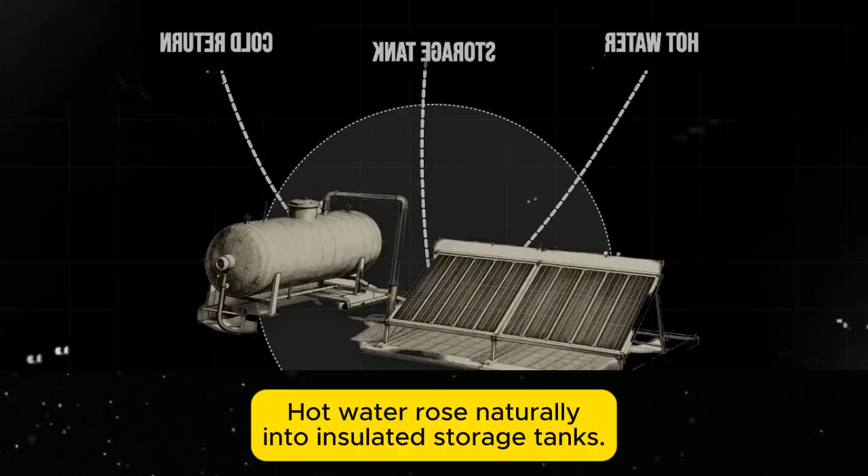Hot water rose naturally into insulated storage tanks. Cold water flowed back down to be heated again. No pumps, no motors, no operating cost. The system worked day after day with nothing but sunlight and gravity.

By 1941, more than 50,000 homes in Florida alone were running on solar thermal energy. Families in Miami and Tampa had hot water and supplemental heating while paying nothing to utility companies. This was not experimental technology. This was not fringe science. This was functioning infrastructure serving tens of thousands of American households.

And then, the eraser moved in. After World War II, natural gas pipelines spread across the nation. Petroleum companies, swollen with wartime profits, pushed aggressively into state legislatures. Building codes began to change. Homes suddenly needed gas lines, furnace rooms, ventilation systems, and installations that only licensed contractors could handle.

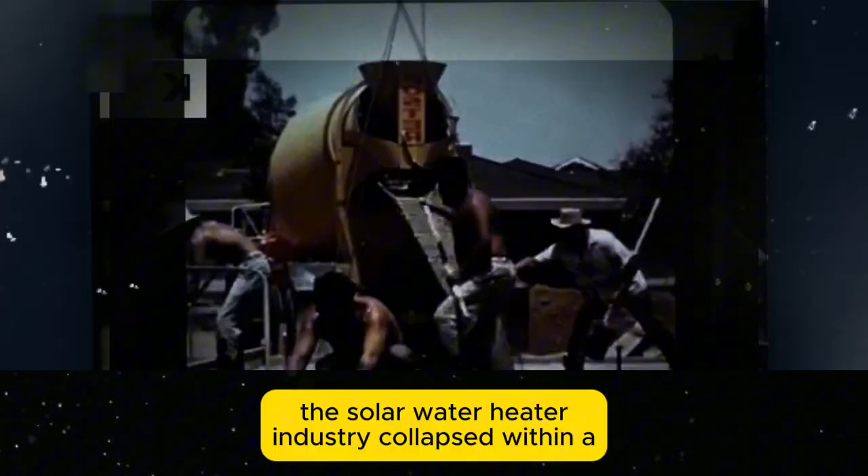Solar thermal research lost funding. Patents were bought and locked away. In Florida, the solar water heater industry collapsed within a decade as artificially cheap natural gas flooded the market. An entire generation grew up without ever realizing their grandparents had once built working solar systems on their own rooftops.

The knowledge did not disappear because it failed. It disappeared because it threatened the wrong balance sheets. But the physics never changed.

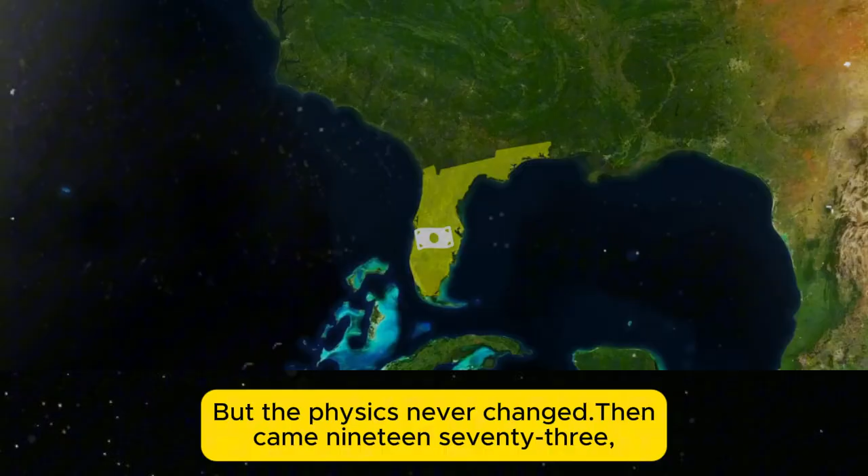Then came 1973, and the Arab oil embargo forced Americans to remember what had been buried. Heating fuel shortages spread fear across the country. Gas station lines wrapped around blocks. Thermostats in homes across the Northeast dropped to 55 degrees Fahrenheit. Families in Minnesota and Michigan stared into winter without knowing if they would have enough fuel to get through it.

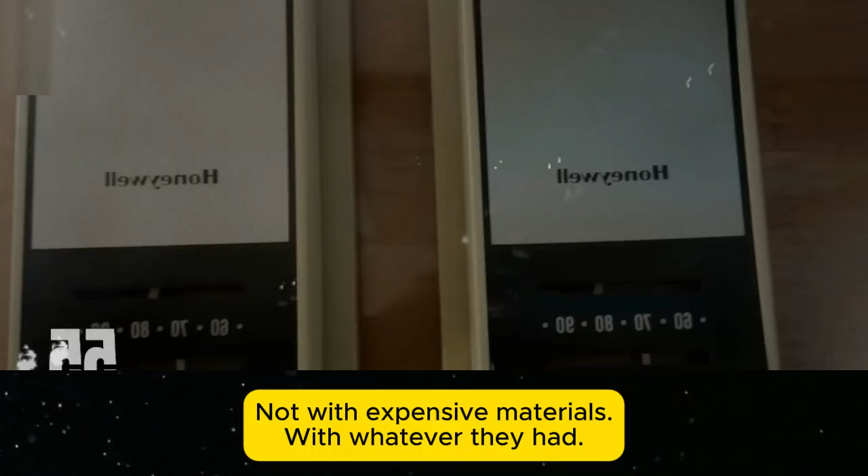And in garages, sheds, and workshops across America, backyard inventors started experimenting again. Not with luxury systems, not with expensive materials, with whatever they had. They tried sheet metal, copper tubing, old radiators painted black.

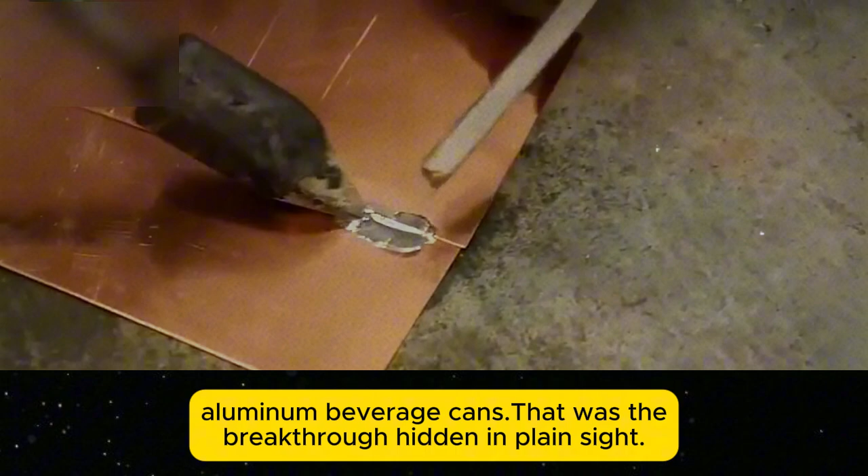But one design rose above the rest because it used something almost every household already had in abundance: aluminum beverage cans. That was the breakthrough hidden in plain sight. Hollow cylinders that naturally channeled airflow. Aluminum that transferred heat with remarkable efficiency. The supply was effectively endless.

Every week, every house produced more of them. And the numbers backed it up. Aluminum conducts heat about 5 times better than steel. That was not just convenient, it was almost perfect.

Mother Earth News published construction plans for PopCan solar heaters in 1977, and tens of thousands of readers built them that very winter. Then reports started pouring in from Vermont to Colorado. Output air temperatures rising by 30 to 40 degrees Fahrenheit.

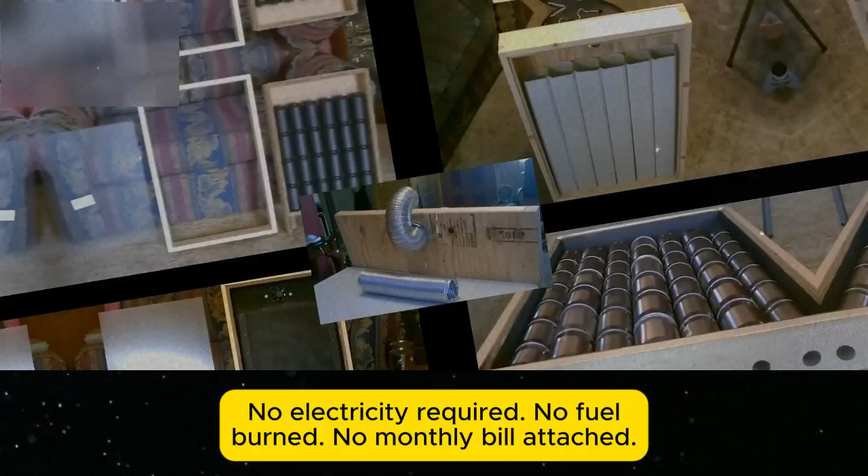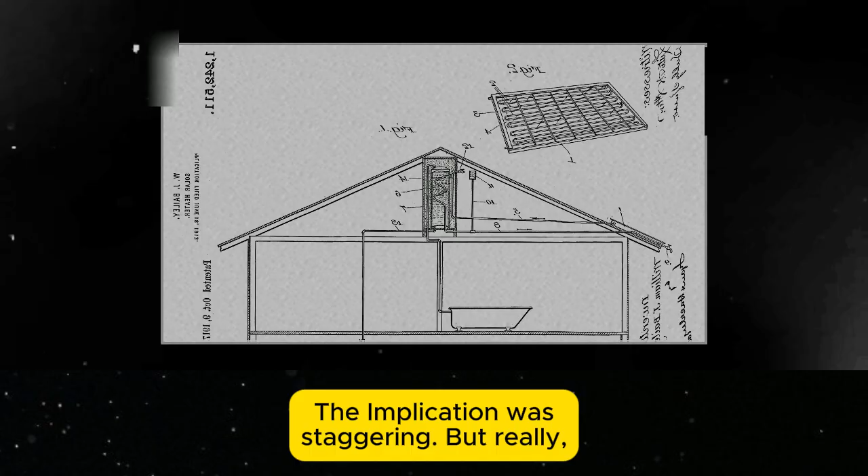Rooms warming noticeably on sunny winter days, with no electricity required, no fuel burned, no monthly bill attached. What made it even more astonishing was this: the same thermosiphon principle William Bailey patented in 1909 worked just as effectively with beer cans as it had with copper pipes. Ordinary people realized they could heat their homes using materials headed for the landfill. The implication was staggering, but really the only thing shocking was how long people had been taught not to notice.

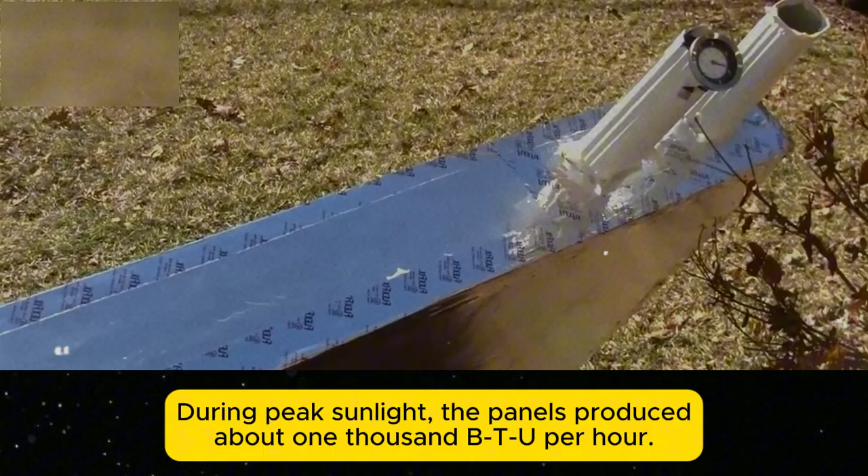Modern science has since confirmed what those 1970s builders discovered with their own hands. In 2019, researchers at the University of Alberta in Canada tested do-it-yourself pop can solar heaters in real winter conditions, not ideal lab conditions, real cold. At minus 15 degrees Celsius, with snow on the ground, the test panels still achieved a steady 20 degree Celsius temperature rise in the output air. During peak sunlight, the panels produced about 1,000 BTU per hour. That is not symbolism, that is not hype.

That is measurable, useful heat pulled out of recycled waste. The National Renewable Energy Laboratory has also documented that dark-colored surfaces absorb about 95% of incoming solar radiation. Flat black paint on aluminum reaches exactly that kind of absorption performance. Commercial solar air heaters priced between $2,000 and $4,000 use the same underlying physics, the same sun, the same heat trapping, the same air movement.

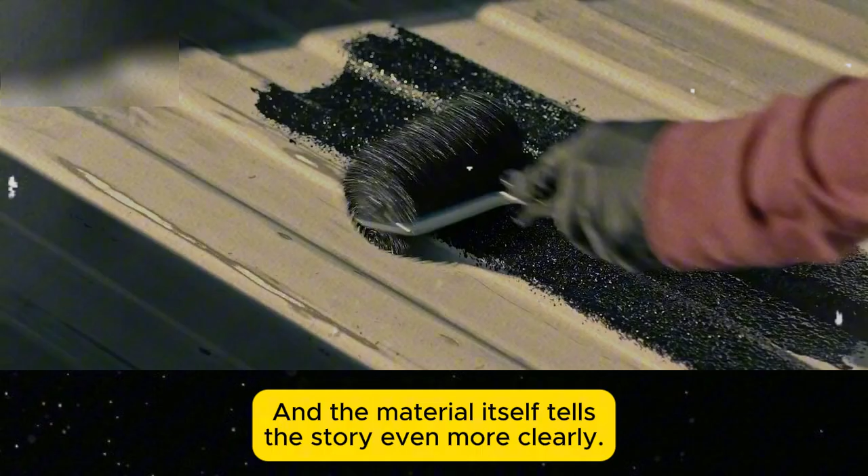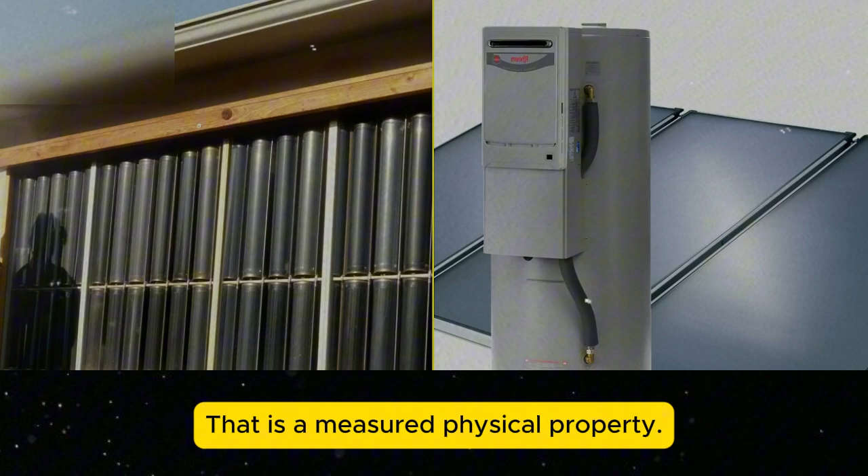The only real differences are branding, packaging, and building code approval. And the material itself tells the story even more clearly. The aluminum in a Coca-Cola can conducts heat at 205 watts per meter Kelvin. That is not a guess, that is not a sales pitch, that is a measured physical property. It does not matter whether that aluminum is sitting in a research laboratory or crushed under coffee grounds in your recycling bin. The physics stays the same, the opportunity stays the same. Only our attention changes. So how does a wall of empty cans actually heat a house?

The answer is almost embarrassingly simple, and that may be exactly why it was so dangerous to industries built on complicated systems and recurring payments. Hot air rises, cold air falls. That is the thermosiphon principle. No electricity, no pumps, no moving parts.

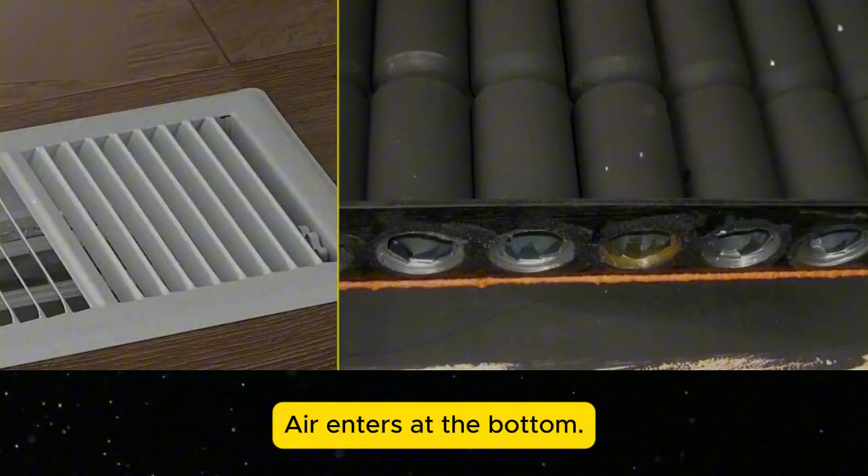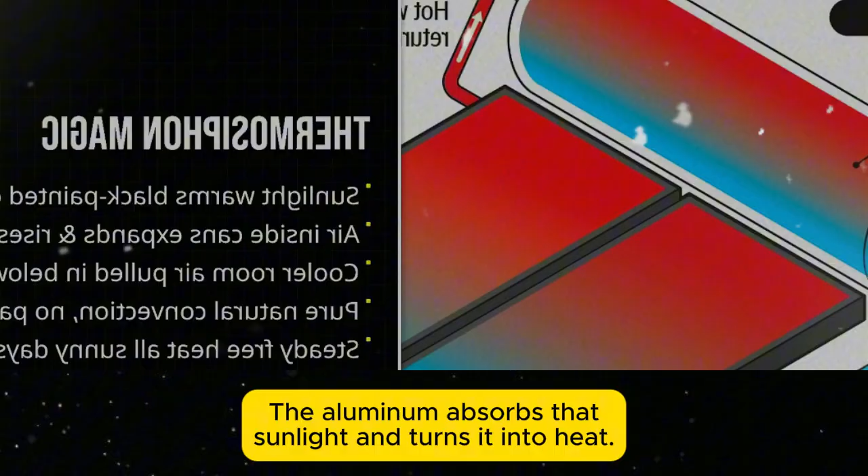Imagine a vertical column of aluminum cans with the tops and bottoms removed. Air enters at the bottom. Sunlight passes through the glass glazing and strikes the black painted cans. The aluminum absorbs that sunlight and turns it into heat. The air inside the cans warms quickly, and because warm air is less dense than cold air, it rises through the column and exits at the top. That rising air creates negative pressure at the bottom, which pulls more cool air in. The cycle repeats itself as long as the sun is shining.

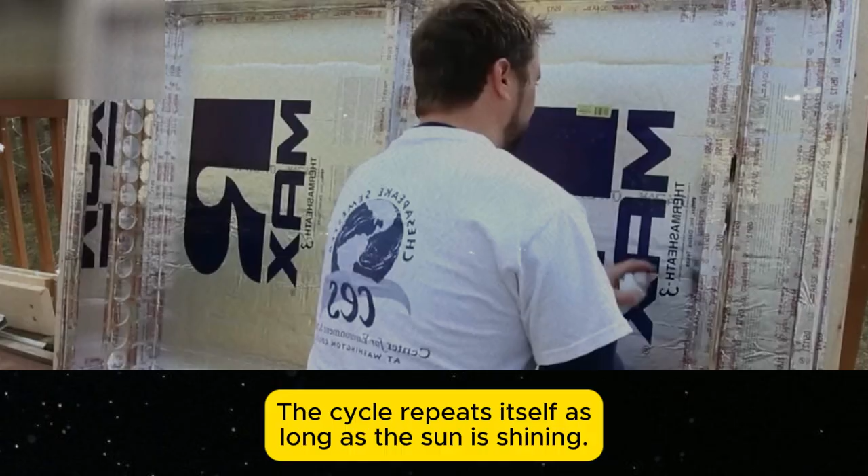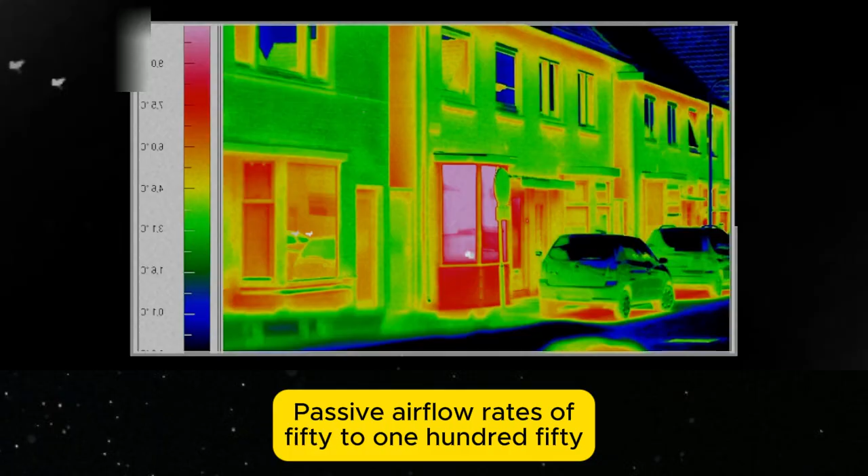That means no switches to flip, no buttons to press, no fuel deliveries. The sun does the work while you live your life. Passive airflow rates of 50 to 150 cubic feet per minute can occur with zero energy input. And the glazing is what makes the whole system intensify.

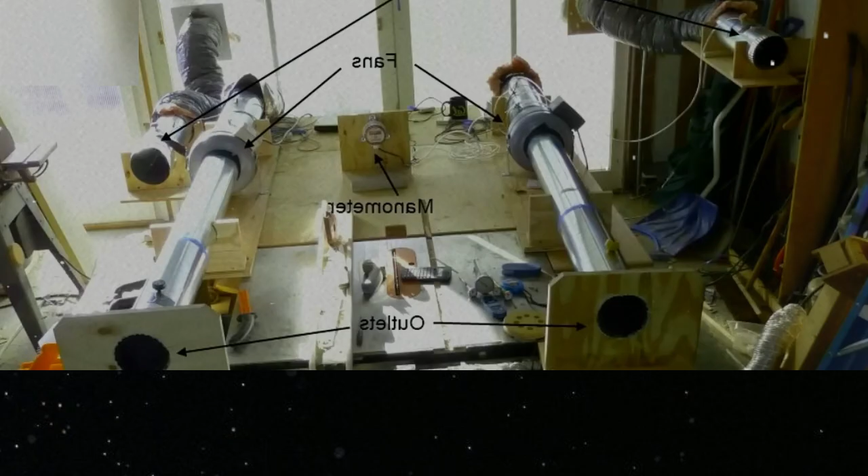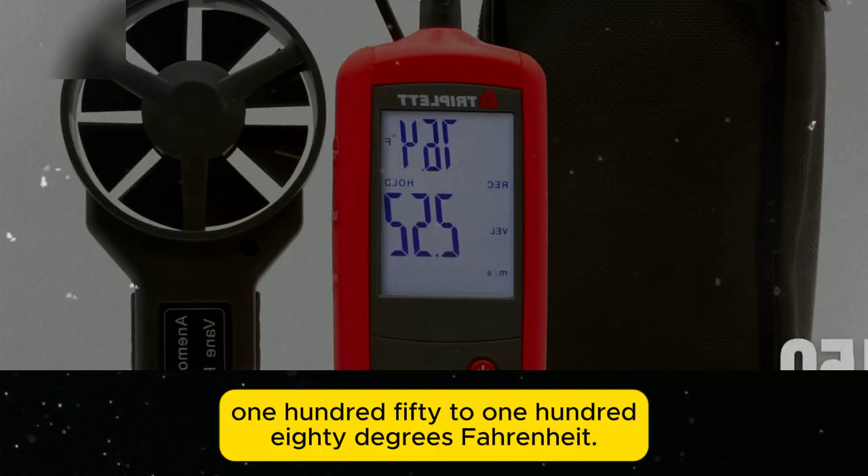What de Saussure demonstrated in 1767 is still doing the heavy lifting today. Shortwave solar radiation passes through glass with ease. When it hits the black aluminum, it becomes long-wave thermal energy. That heat does not escape back through the glass nearly as easily. It gets trapped. Collector temperatures on sunny winter days can reach 150 to 180 degrees Fahrenheit.

With insulated backing behind the cans to stop heat from escaping through the wall, that warmth is pushed inward, into the living space, carried by the natural convective flow of air. That is where the real power of this idea starts to reveal itself. Not in fantasy, not in slogans, in basic, repeatable physics that never stopped working.

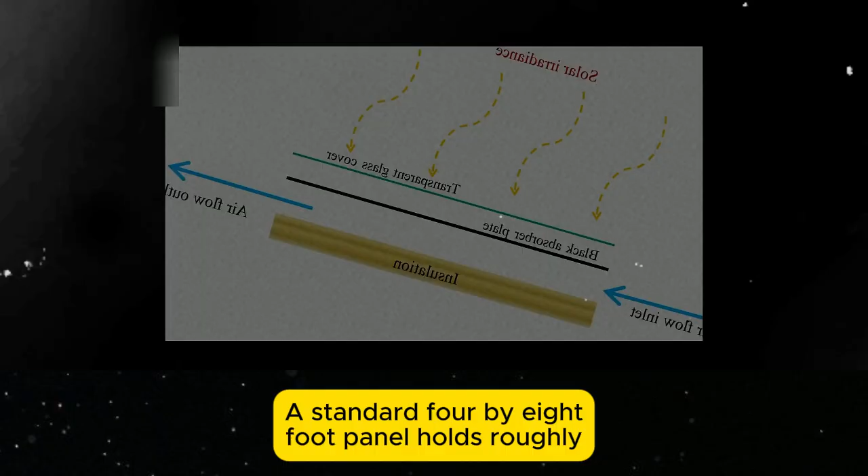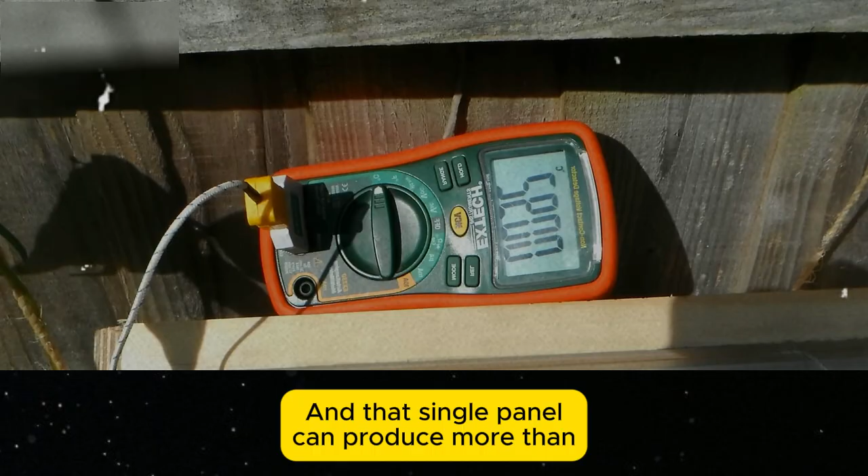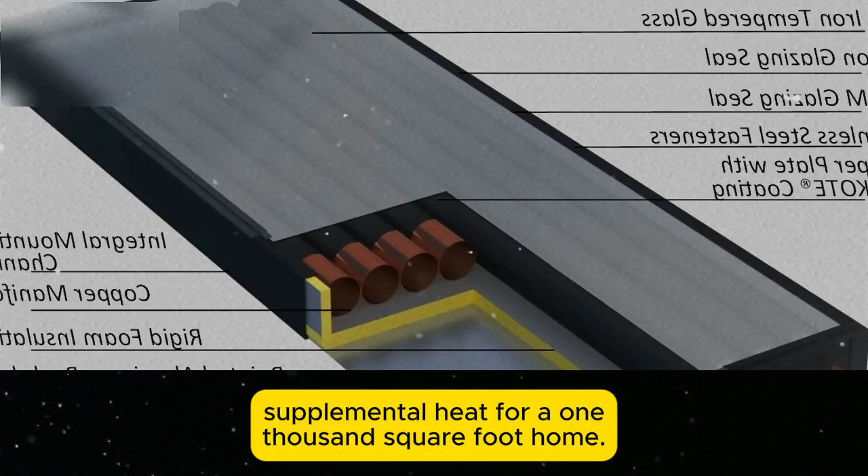The numbers make the case with brutal clarity. A standard 4x8 foot panel holds roughly 240 aluminum cans arranged in vertical columns. Depending on the depth of the frame, each column usually contains 8 to 10 cans. That single panel can produce more than 1,000 BTU per hour during peak sunlight. Four panels mounted on a south-facing wall can provide supplemental heat for a 1,000 square foot home. Material costs, when salvaged lumber and recycled cans are used, fall between $50 and $100, meanwhile the commercial equivalent sells for $2,000 to $4,000, while relying on exactly the same physical principles.

That is what makes this so hard to ignore. The difference is not in the science. The difference is in who gets paid.

But really, the foundation for all of this was laid long before the first soda can was ever pulled from a vending machine. In Geneva, in 1767, Horace Benedict de Saussure built 3 nested glass boxes, each smaller than the one before, each painted black inside. He placed them in the Alpine sun and watched the temperature rise to 230 degrees Fahrenheit, hot enough to cook fruit, hot enough to prove, beyond argument, that sunlight could be trapped, intensified, and turned into useful heat.

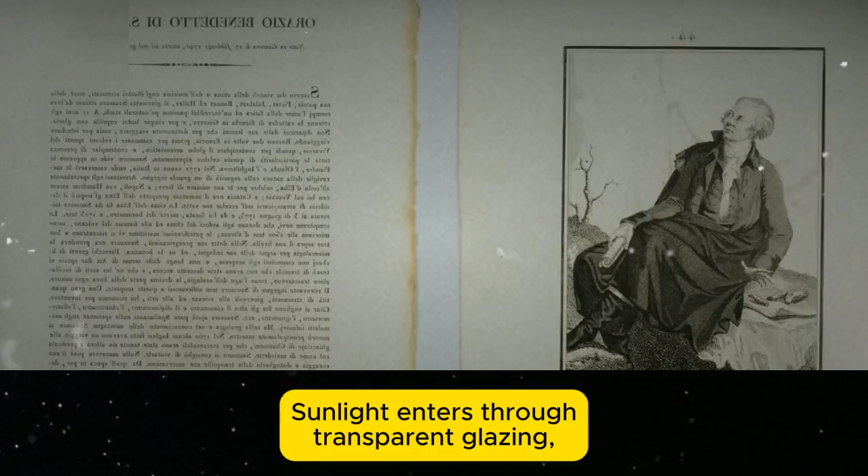That was the first hotbox, and really, the principle has not changed since then. Sunlight enters through transparent glazing, strikes a dark surface, converts to heat, and gets trapped inside.

Your great-grandparents in Florida used it before petroleum interests pushed it out of building culture. The system did not vanish because it stopped working. It vanished because other systems became more profitable.

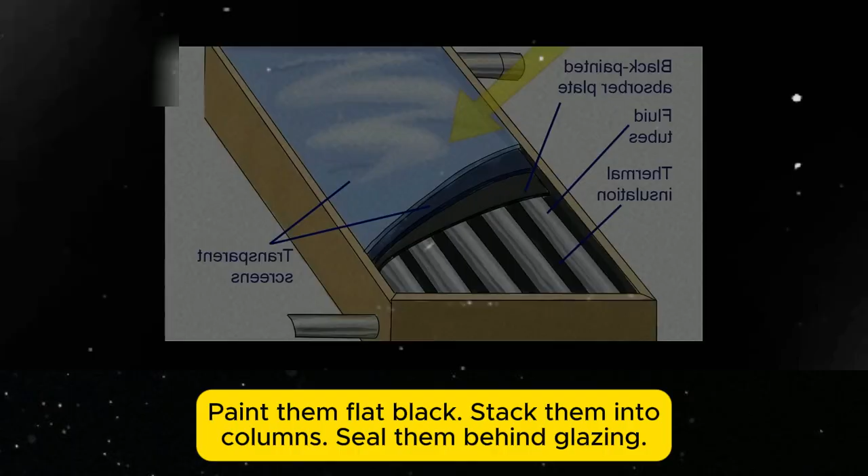And now, here it is again, hiding in plain sight. Those crushed aluminum cans in the recycling bin are not just waste. They are thermal collectors waiting to be recognized. Paint them flat black, stack them into columns, seal them behind glazing. Suddenly, they become part of the same heat engine de Saussure demonstrated back in 1767.

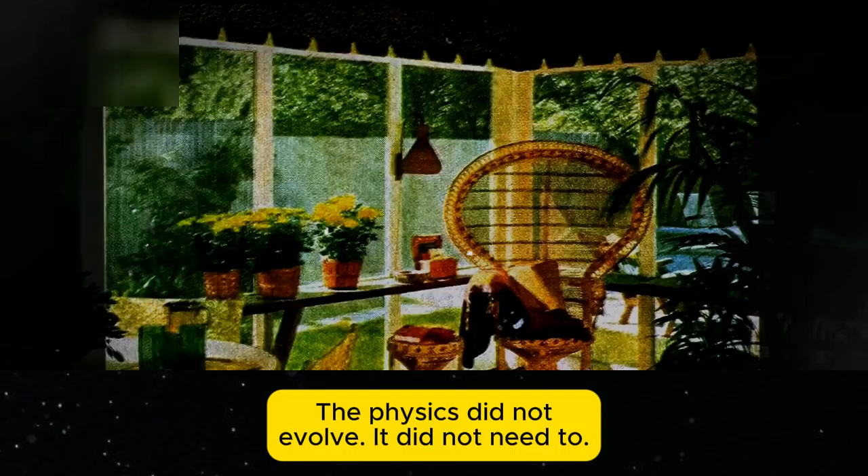The physics did not evolve. It did not need to. What changed was what society chose to remember and what it chose to forget.

A 4 by 8 foot panel can hold around 240 cans, arranged in long vertical rows. Cold air enters through the bottom. It rises through sun-heated aluminum and exits at the top, often 15 to 20 degrees Celsius warmer than when it entered. On a clear winter day, that can mean several thousand BTU of free heat.

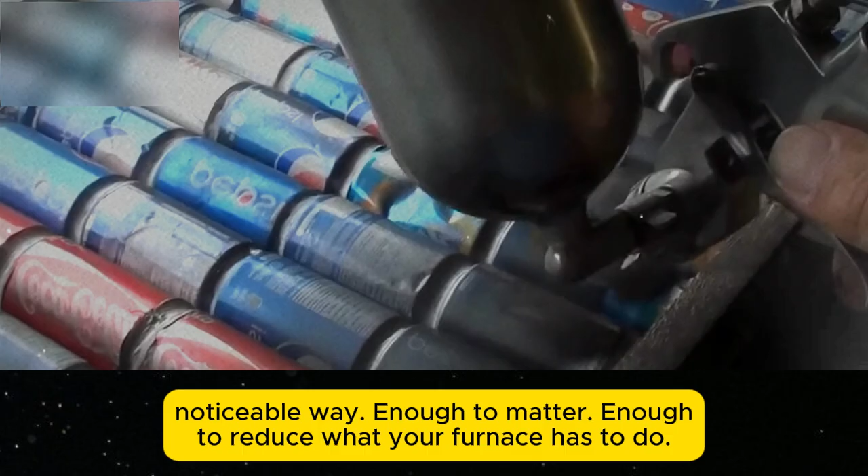Enough to warm a room in a real, noticeable way. Enough to matter. Enough to reduce what your furnace has to do. And it does all of that without burning fuel, without consuming household electricity, and without involving the utility company at all. The materials themselves tell you exactly who this technology belongs to.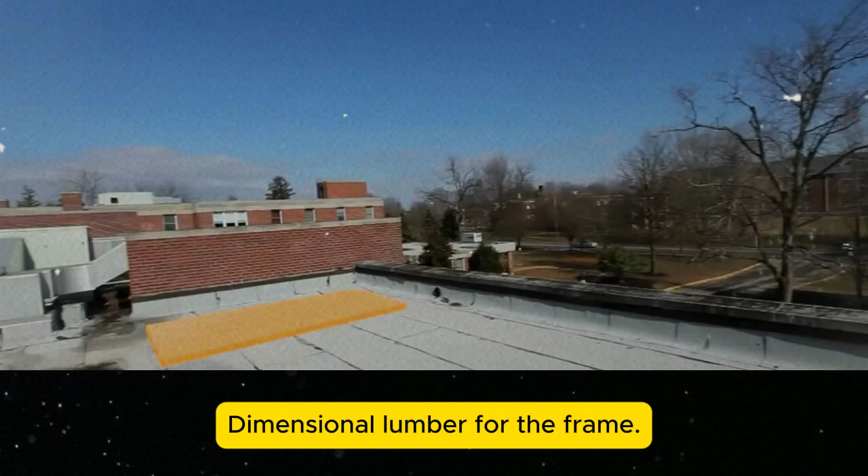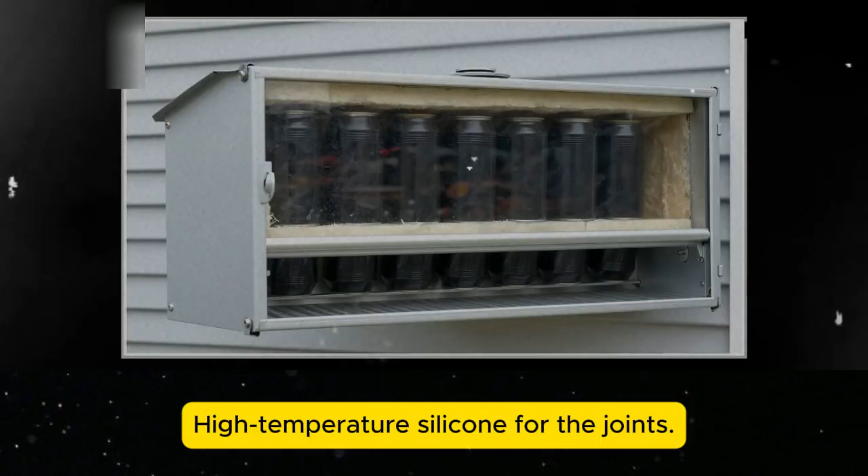Dimensional lumber for the frame, plywood for the backing, foil-faced rigid foam to stop heat from conducting backward through the wall, polycarbonate or tempered glass for the glazing, something transparent that lets sunlight in and traps warmth inside, high-temperature silicone for the joints, flat black grill paint, the kind made for wood stoves, because ordinary spray paint blisters under collector temperatures and glossy finishes reflect the very energy you are trying to capture.

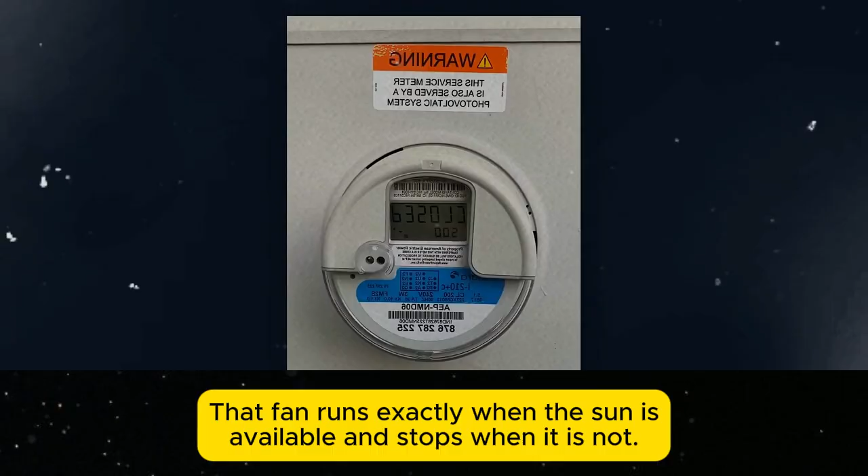Then, for builders who want active assistance, a small 12-volt fan, often salvaged from an old computer and powered by a tiny solar panel. That fan runs exactly when the sun is available and stops when it is not. No thermostat, no complex wiring, no electrician. Just timing built into the sunlight itself.

That is the elegance of the design. Every piece serves a purpose. Nothing exists to create artificial complexity. Nothing is there just to force dependence on specialists.

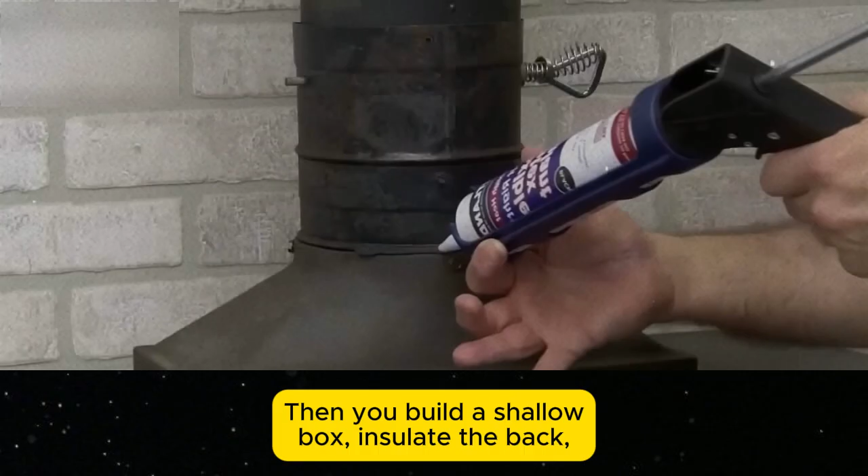You rinse the cans. You punch holes in the bottoms for airflow. You stack them into columns and seal the joints with furnace cement. Then you build a shallow box, insulate the back, and drill the openings needed to hold the can columns in place. At the top and bottom, you create plenum chambers where air gathers and redistributes.

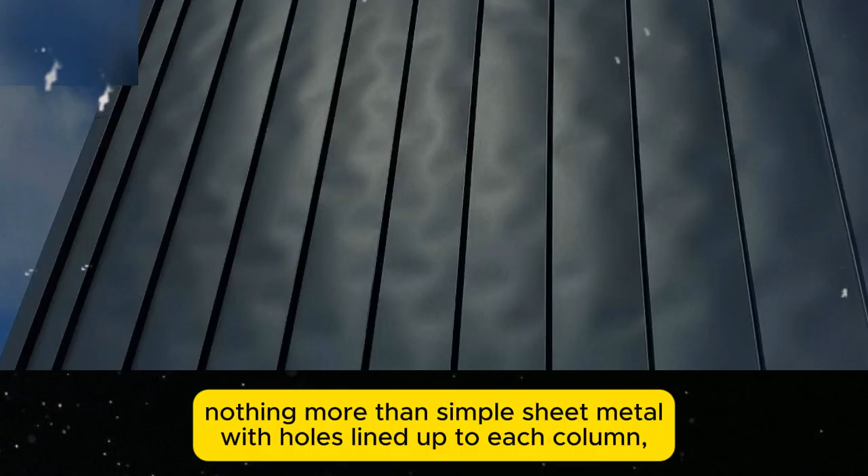Baffle plates, nothing more than simple sheet metal with holes lined up to each column, keep the airflow moving through the intended path instead of skipping around the edges. Because that matters. Airflow is everything here. If the air bypasses the heated cans, performance collapses.

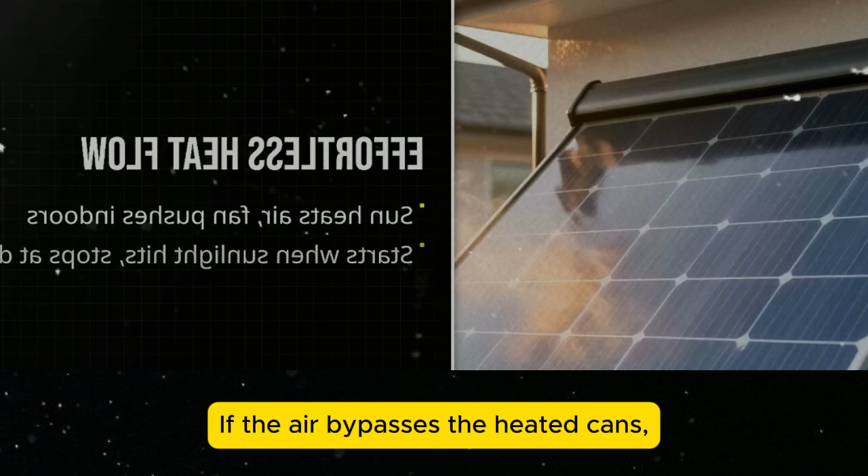And that leads to one of the most important details of all, sealing. The glazing closes off the front of the collector, and every joint must be caulked carefully, because air leaks destroy efficiency faster than almost any other construction flaw.

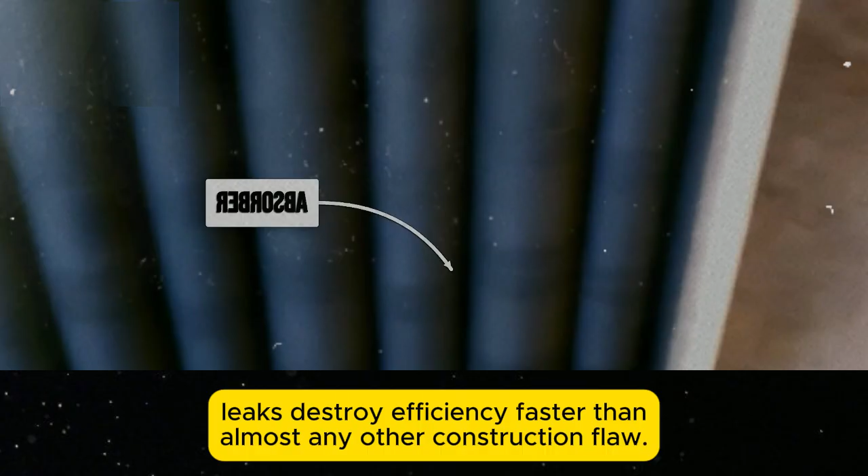The whole assembly mounts on a south-facing wall and connects to the interior through 2 round vents. Cool room air exits low. Warm air returns high. That is the loop. That is the engine. During the day, sunlight drives it.

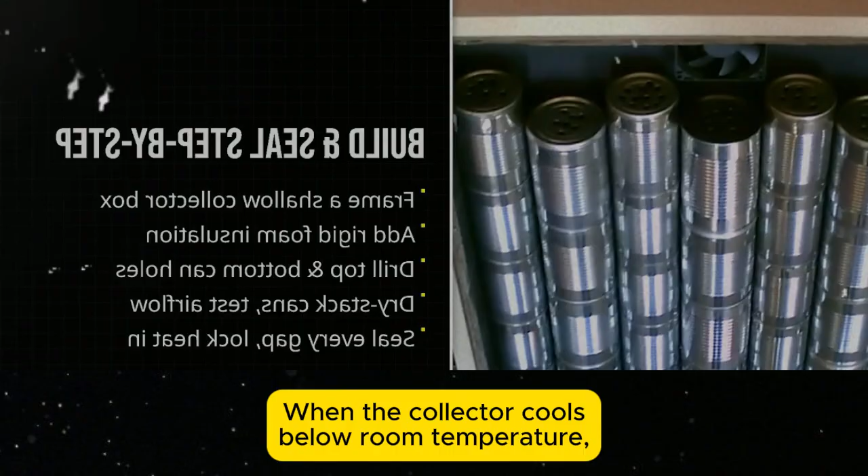But at night, there is a danger. When the collector cools below room temperature, reverse thermosiphon can begin pulling heat back out of the house. That is why backdraft dampers matter. And the beautiful part is how simple they are.

They do not need to be complicated devices. They can be lightweight flaps held shut by gravity until rising warm air pushes them open. That is enough to stop the nighttime heat loss and protect the gains made during the day. Even the geometry works in your favor more than most people realize.

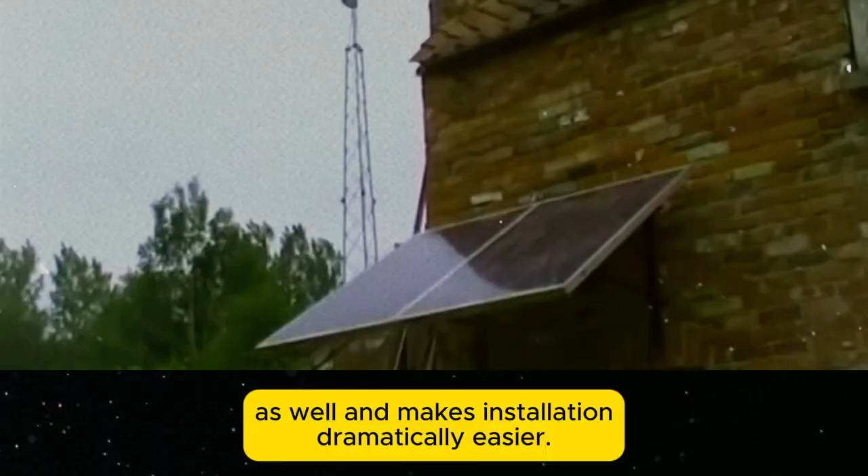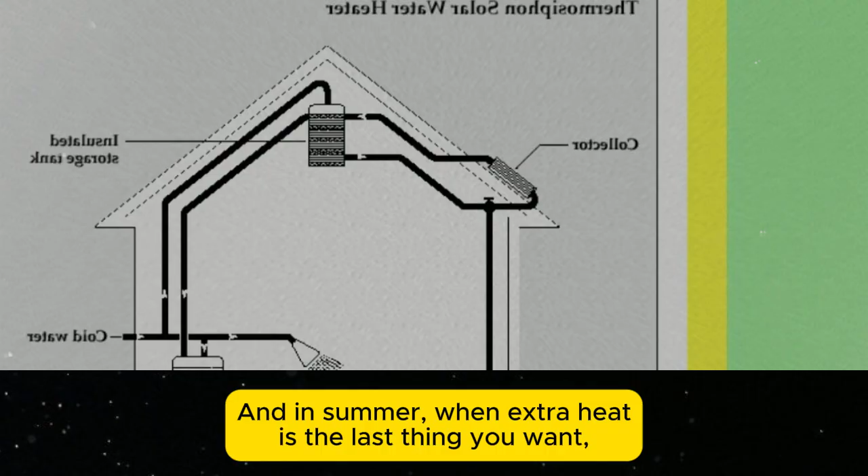A collector tilted at 60 degrees from horizontal captures maximum winter sun, but a vertical mount often works nearly as well and makes installation dramatically easier. In fact, the low winter sun strikes a vertical south-facing wall more effectively than intuition suggests. And in summer, when extra heat is the last thing you want, that same high sun angle barely touches the panel. Some builders go one step further and add a simple overhang to block summer sunlight almost completely. A few dollars in lumber turns a possible overheating issue into a non-event.

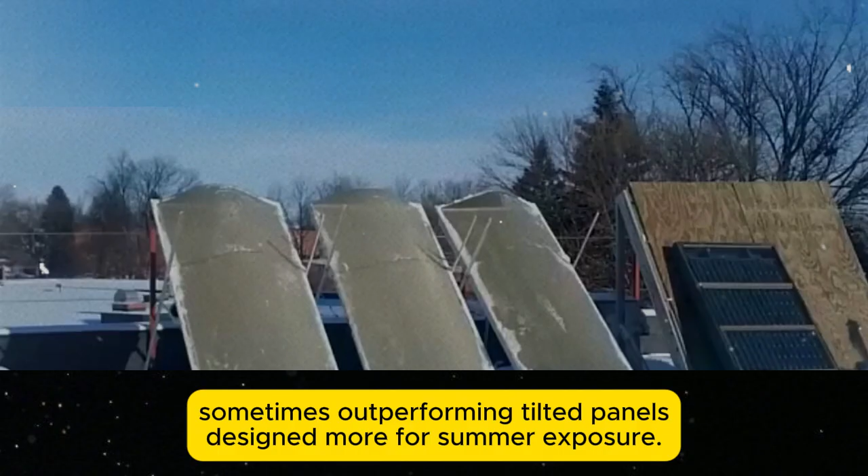The seasonal math is almost poetic in how perfectly it aligns with real need. In the northern hemisphere, winter sun angles can drop as low as 20 to 30 degrees above the horizon at midday. A vertical collector mounted flush on a south-facing wall captures that low-angle light with remarkable efficiency, sometimes outperforming tilted panels designed more for summer exposure. Then the seasons turn. Summer sun climbs to 70 degrees or more, and the high angle glances off that same vertical surface, naturally limiting heat gain during the very months when people are running air conditioning instead of furnaces.

This self-regulation is built right into the geometry. No engineer had to invent it. The Earth's axial tilt was already doing the work. Construction simply had to catch up, and once that warmth enters the house, your home itself becomes part of the system.

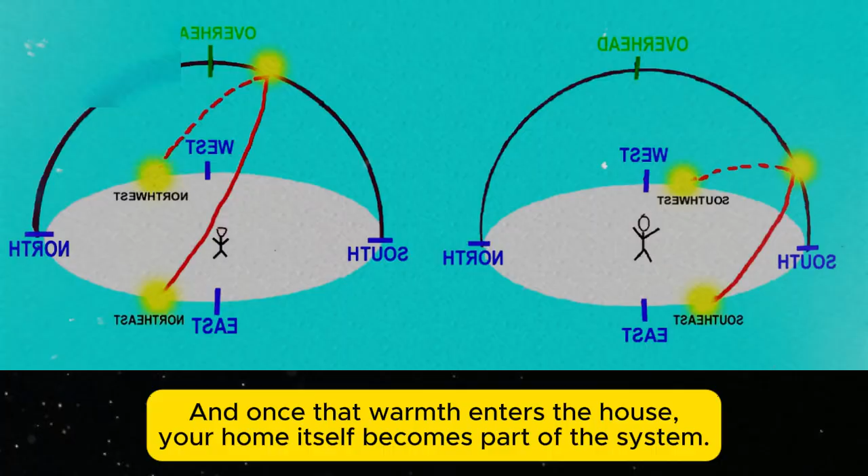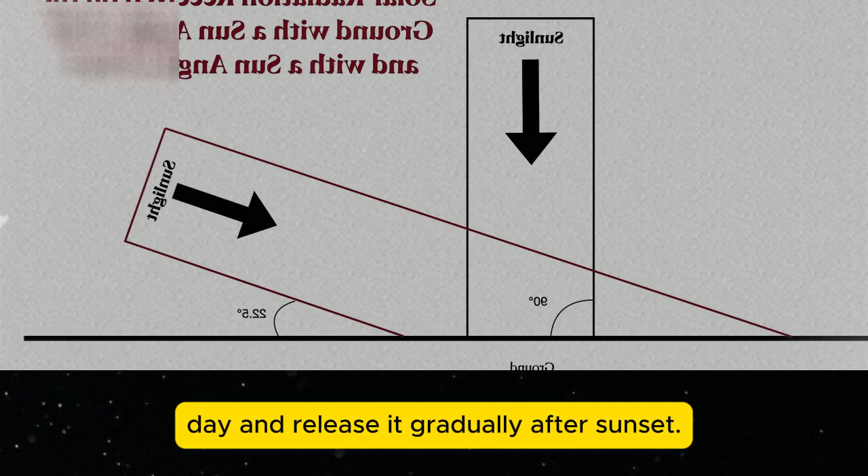Thermal mass changes everything. Concrete floors, brick walls, even heavy furniture absorb heat during the day and release it gradually after sunset. In a well-insulated house with enough mass, the effect of afternoon solar collection can linger deep into the evening. Lightweight homes warm up quickly, yes, but they also let that heat go faster. So knowing the character of your own house tells you what kind of results to expect.

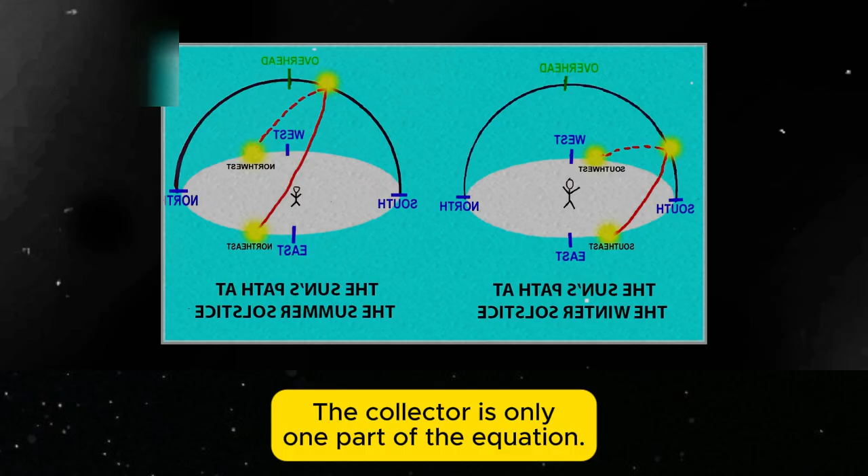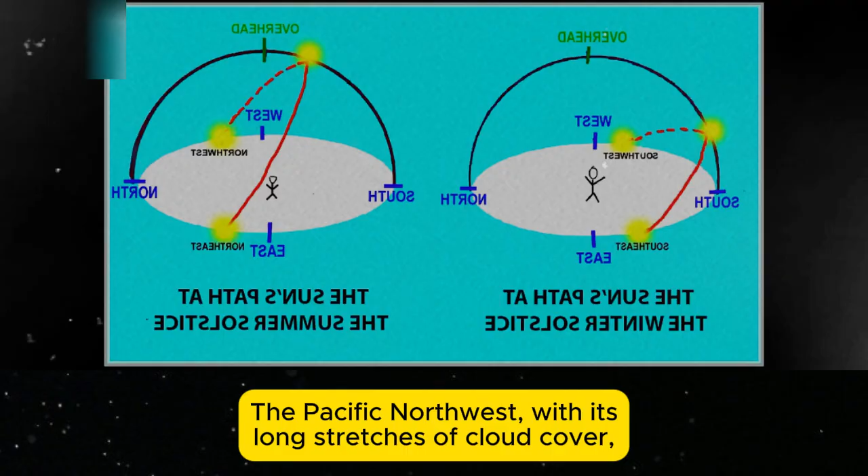The collector is only one part of the equation. The building receiving the heat matters too. Climate matters as well. The sunny but bitterly cold Mountain West can produce excellent results because the skies stay clear even when temperatures plunge below zero. The Pacific Northwest, with its long stretches of cloud cover, sees reduced output, though diffuse light still contributes something. Desert climates receive intense sunlight, but often do not need much supplemental heating in the first place.

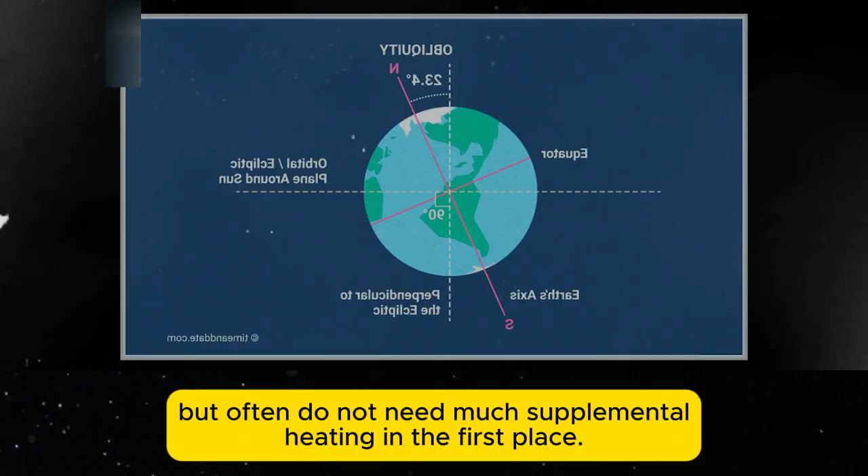The real sweet spot lies in places where winters are cold and sunshine still arrives regularly: the upper Midwest, the Northeast, the Rocky Mountain states, parts of Canada, places where heating bills hurt the most. Places where a simple box filled with painted cans stops being a curiosity and starts becoming a serious tool. That is when this stops sounding like an interesting project and starts looking like a direct challenge to the systems people were told they had no choice but to depend on.

The economics behind this are where the story becomes impossible to dismiss. The Energy Information Administration reports that the average American household spends roughly $1,200 each year on heating. Four panels producing about 4,000 BTU per hour during sunny winter periods can offset somewhere between 15% and 30% of that demand. Think about what that means.

A system built from $50 to $100 in materials can pay for itself in a single heating season, one winter. Compare that to commercial solar installations that often need 10 to 15 years to break even. And here, there is no fuel truck coming down your road, no electric meter spinning faster, no monthly bill attached to every sunrise. The operating cost is permanently zero.

Maintenance is almost laughably small compared with conventional heating systems. Repaint the collector perhaps once a decade. Replace the glazing someday if you chose the cheapest material. That is about it. No technician visits, no annual service contracts, almost no moving parts to fail, no burner assemblies, no heat exchangers, no expensive control boards. You become the technician because the knowledge stays with you.

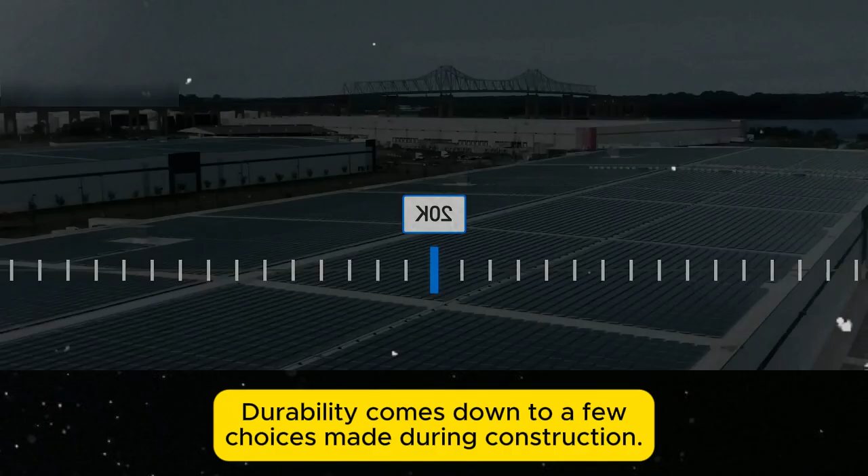Durability comes down to a few choices made during construction. Aluminum has one huge advantage over steel: it does not rust. That alone gives can-based collectors a longer life than many improvised metal designs.

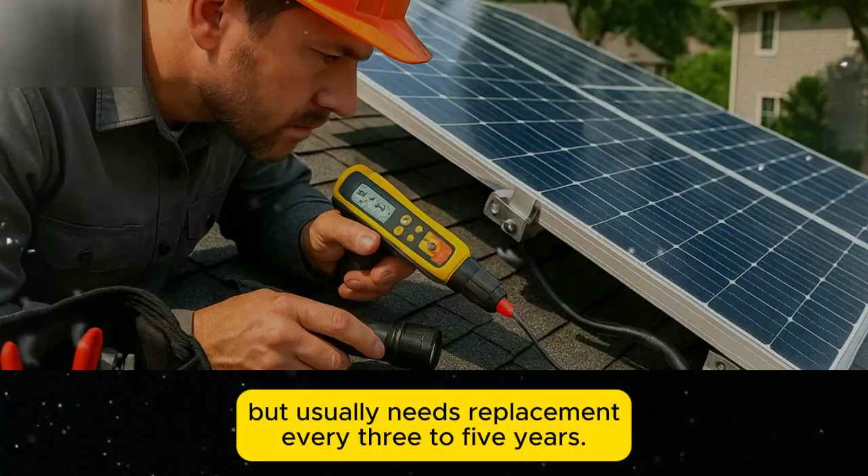Glass can last indefinitely, but it brings weight and the risk of shattering if struck. Polycarbonate twin wall panels handle impact better and provide stronger insulation, but they can yellow after 15 to 20 years of ultraviolet exposure. Greenhouse film costs almost nothing, but usually needs replacement every 3 to 5 years.

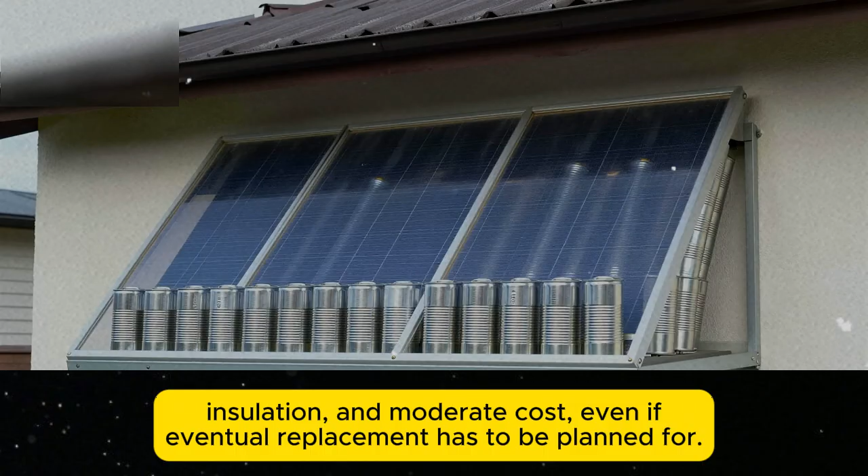Every option comes with trade-offs. Serious builders often settle on polycarbonate because it balances durability, insulation, and moderate cost, even if eventual replacement has to be planned for. Then we arrive at the silence, and that silence says more than any advertisement ever could.

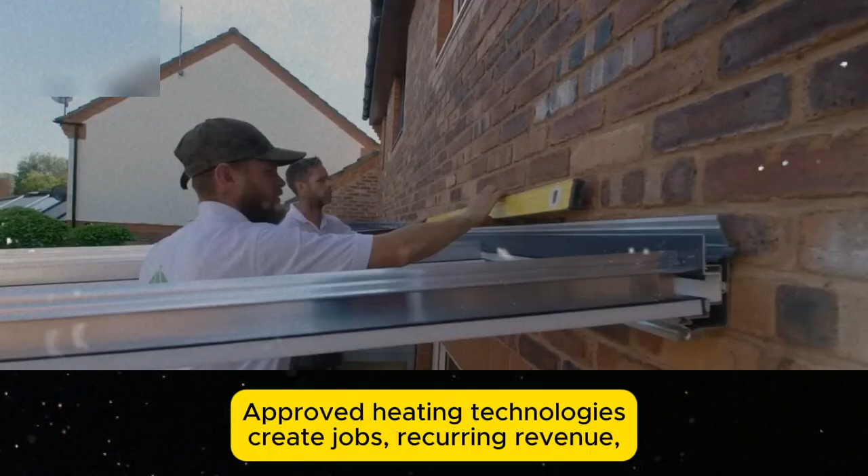Building codes largely ignore this technology. But really, that omission reveals how construction regulation often works in the real world. Code committees are heavily populated by people tied to HVAC manufacturers, licensed contractors, insurers, and the industries that profit when heating systems stay complicated, regulated, and professionally installed.

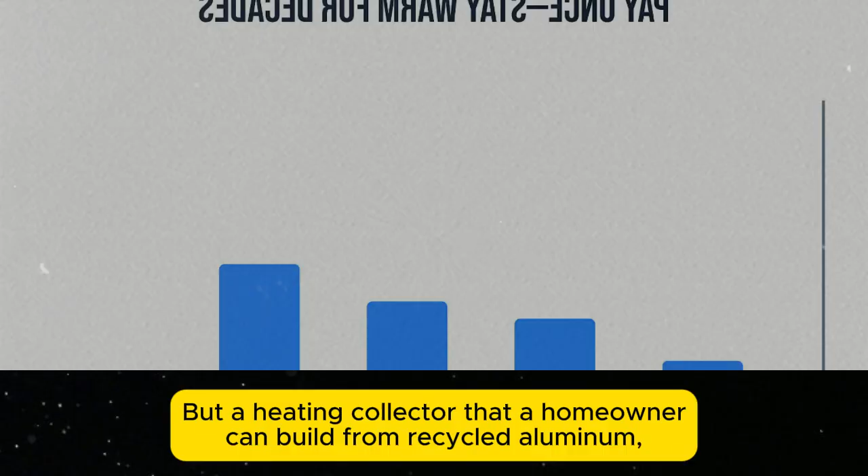But a heating collector that a homeowner can build from recycled aluminum, salvaged wood, insulation board, and a transparent cover has no giant manufacturer behind it, no lobbying budget, no sales team, no campaign to secure code inclusion. So it gets ignored. And really, that silence is not random.

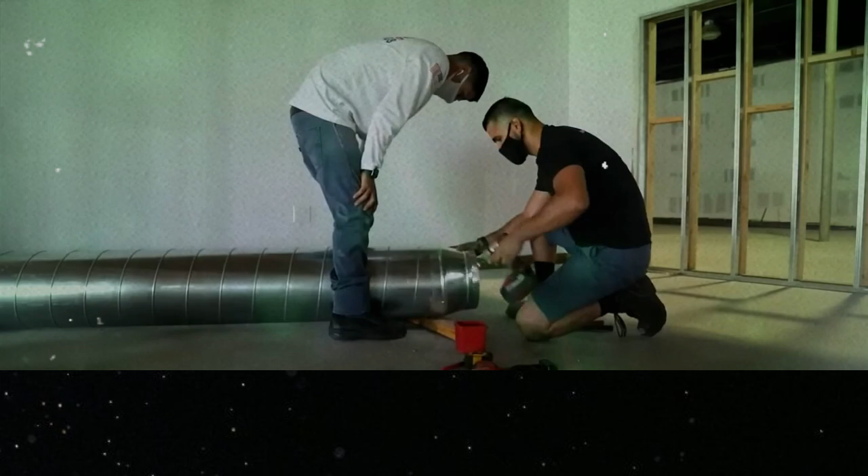Look at what receives tax rebates and utility incentives. Grid-connected solar electric panels often qualify. Why? Because the grid still benefits when you install a system that feeds power back into infrastructure they control and can resell to your neighbors.

But passive solar thermal, the kind that simply lets you stop buying a portion of what they sell, receives almost nothing. That distinction matters. The grid profits when you stay connected. It does not profit when you quietly reduce demand with a collector mounted on your own wall.

Incentive structures reward technologies that preserve the relationship. They neglect technologies that loosen it. Follow the rebates, and you follow the money. Every BTU you collect from sunlight is a BTU you do not purchase from a utility, a fuel oil supplier, or a natural gas provider.

Passive solar does not threaten physics. It threatens recurring revenue. And that is the entire issue.

This is not some dramatic conspiracy theory that needs fantasy to survive. It is economics. Technologies that erase ongoing payments rarely attract serious investment because there is no endless stream of billing attached to them. They do not generate dependence. They do not create subscription-like revenue.

So they are not aggressively promoted. They are not pushed into codes. They are not handed flashy campaigns. They are quietly forgotten beneath more approved, more expensive, more professionally mediated alternatives.

But none of that changes the one thing that cannot be negotiated away. The sun still delivers roughly 1,000 watts per square meter and asks for nothing in return. The same physics demonstrated in Geneva in 1767 still works in a backyard, on a garage wall, or beside a shed. Aluminum painted flat black still absorbs around 95% of incoming solar radiation.

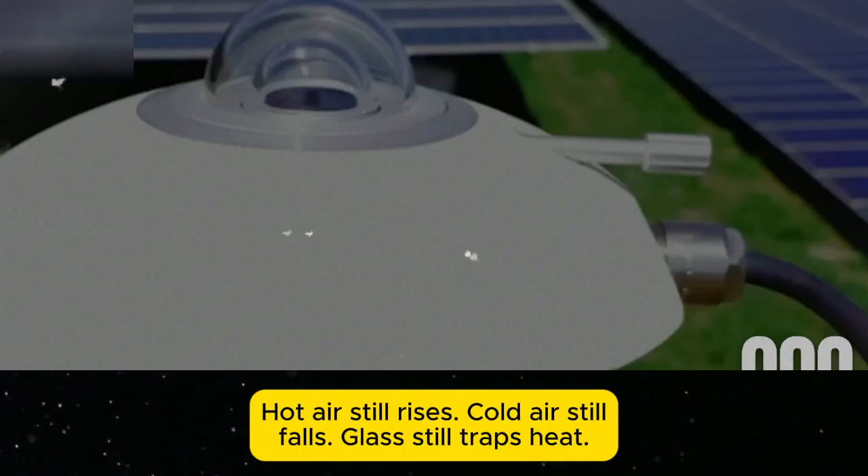Hot air still rises, cold air still falls, glass still traps heat. Insulation still keeps it from escaping backward. That chain of truth has survived every code revision, every market shift, every lobbying campaign, and every generation taught to look past the simplest answer.

And there is something deeper in that. At Yazd, Persian ice houses still stand after 2,400 years. De Saussure's hotbox principle still warms greenhouses across Scandinavia. Your great-grandparents knew these systems worked.

Families in Florida and California once used them openly before a different economic order took over the building culture. The science was never lost. What changed was who profited from your forgetting.

Now the blueprints are everywhere. Builders have refined them online over decades. Forums are filled with people who measured real performance, tested different layouts, compared glazing materials, experimented with fan assistance, and documented what happened in actual winter conditions.

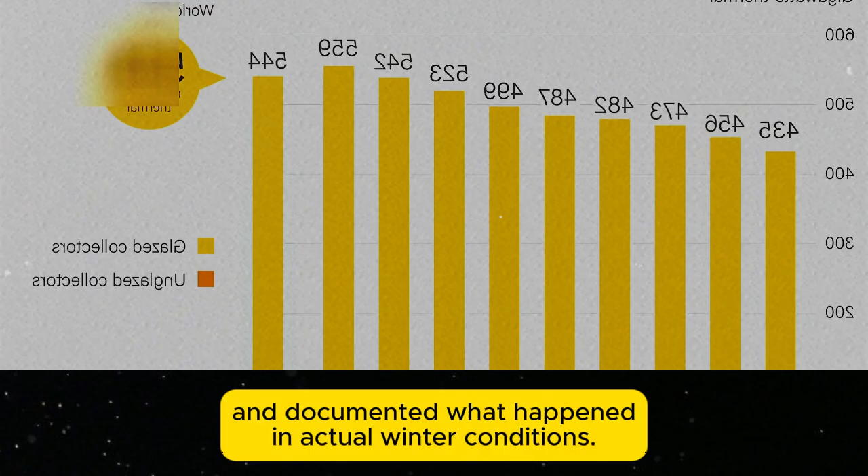The materials are still cheap, in some cases almost free. The skills required are not mysterious. A patient person can learn them in an afternoon: clean cans, cut airflow openings, seal the joints, build the box, insulate the back, glaze the front, mount it where the winter sun can strike. That is not industrial magic. That is practical knowledge.